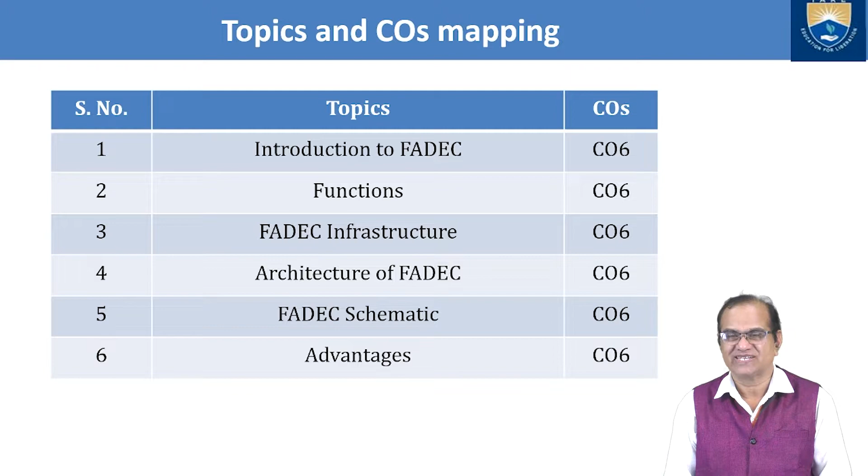FADEC basically uses a lot of sensors, and these sensors feed the computer, and this computer further gives signals to the actuators, and these actuators work. It is an automated system. Nowadays most aircraft have FADEC, and even automatic driverless cars are using the FADEC system nowadays. So I will go with the introduction first. Introduction to FADEC.

Full authority digital engine control, FADEC, means just that: there is no direct pilot control over the engine or manual control mode. So if you are using FADEC, the pilot does not have any control over the engine. The engine will be fully operational and do all the functions without any intervention of manual control. If the FADEC fails, the engine also fails. So that is a very big drawback.

However, system redundancy makes it much less likely for a FADEC system to fail than a traditional magneto system. The FADEC is made in such a way that there is little chance of it failing, and it is much superior to the traditional magneto system we used before FADEC was developed. In fact, a double magneto failure is statistically more likely than a FADEC failure. So even with a double magneto, the FADEC system is much better than the previously used magneto systems.

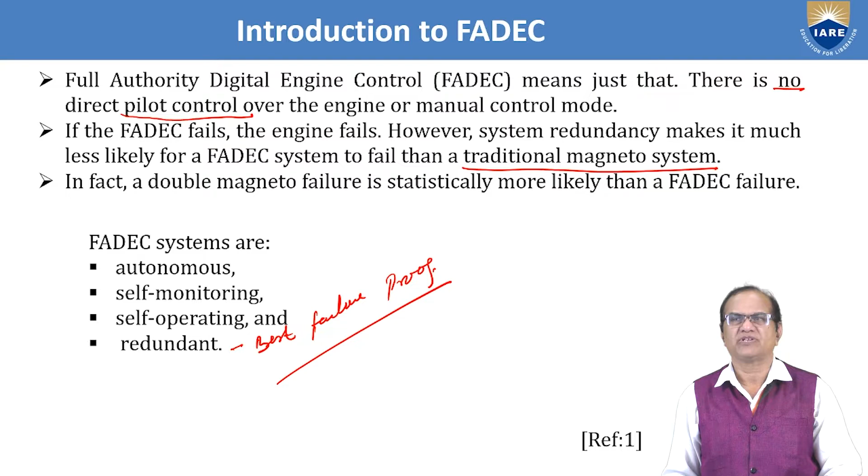This is also self-monitored and also self-operating, and then redundant. It is failure proof. Almost it is the best failure proof. That is the redundant. That is why the FADEC is used nowadays in most of the aircraft. Okay, I have shown here the functions of the FADEC. So here we can divide into 3 groups.

FADEC will control the engine, that is called the engine control. FADEC will also be useful for the airframe communication. Okay, it will also do the engine health monitoring. So this has got 3 functions. One is the engine control, second one is airframe communication, third one is the engine health. So this is the first one, this is the second one, and here is the third one. So these three functions it is performing.

So if we talk about the engine control, the engine control is done by acquiring sensor data. Then it processes the control laws and then command actuation. So in the atmosphere and other places, sensors are fixed. These sensors will pick up the data and they will give to the computer. In the computer, data will be processed as per the control laws. These laws will be applicable and this will give command to the actuators. And this actuator will function and your quantity of fuel will be less or more as per this data.

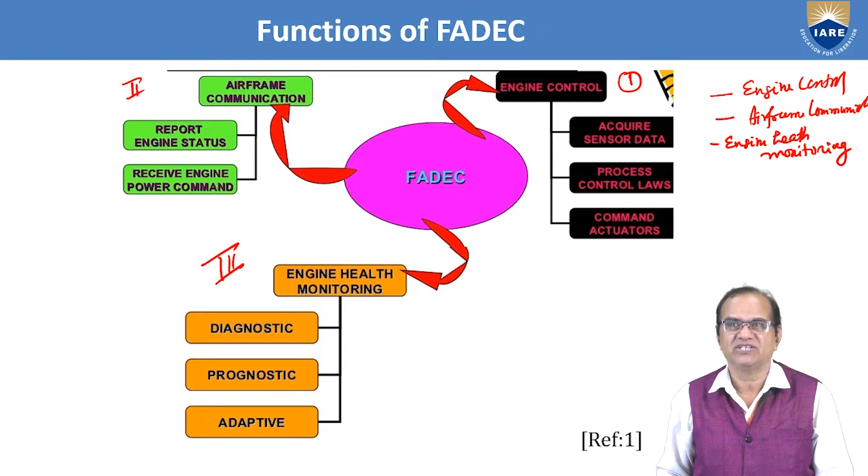So what are the features of this FADEC? The control and monitoring of engine operation. So it is the main function of this thing, control and monitoring of the engine operation, dual channel and the redundancy. For everything you have the double system. So the redundancy of the aircraft and engines is very highly increased.

Engine life monitoring. This will also monitor the engine life. It is also measuring the wear and tear of the gas turbines, compressors and all the equipment associated with the engine. Record of engine performance parameters: this is also recording engine performance. At every flight it is recorded in the recorder. Automated troubleshooting. If any fault is going to happen or has already happened, the problem is automatically solved by another standby system.

Memory read or recall of engine data. It is also memory read, the full record of the engine, all performance, all parameters, all different types of activities are recorded for the engine data. Control of common engine problems. Those problems which are very frequently coming are also solved by the help of FADEC. Display of warning. These warnings will be displayed in the cockpit for the pilot. So the pilot can also know that there is going to be some problem or some problems have already happened.

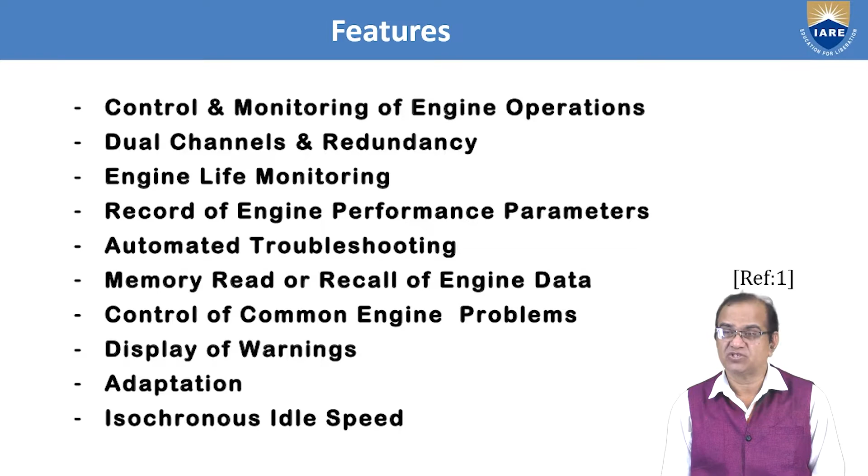Next, it is adapting as per the situation. It also gives isochronous idle speed. So it will also help for this purpose. If you talk about the FADEC infrastructure, different types of infrastructure are needed for different aircraft. So this infrastructure is divided into a number of parts. Here, the first part I am going to discuss is the control operation in a gas turbine engine. In a gas turbine engine, how the control is operated.

So you can see here that this is the combustion chamber, I am writing CC, and here is the propeller, it is rotating, and from here you will get how much thrust is produced.

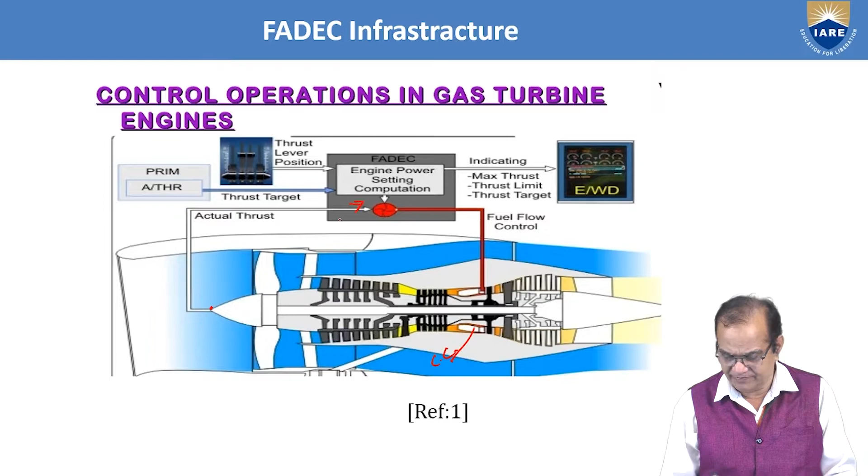So this thrust input is coming here, and the temperature fuel flow is going from here. Here we have the engine power setting computation. It is a FADEC here. So it is computing how much power is required. Here we have primary A and thrust target, and here thrust lever position.

So as per this actual thrust, how much it is coming, it will sense here, and then it will target thrust here, and accordingly this thrust lever will be operated for the system. If you see here, you will get the indication in the cockpit. You will get maximum thrust, you will get the thrust limit and the thrust target. All will be visible in this screen,

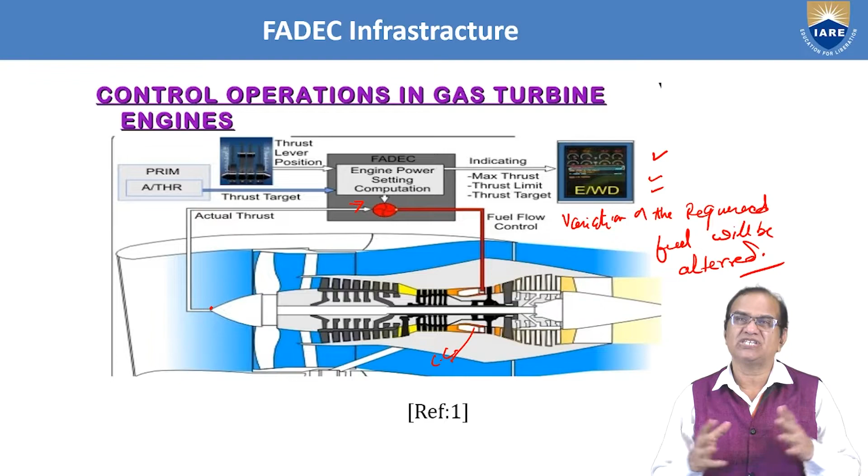and accordingly the variation of the required fuel will be altered. Okay, so that is the objective of such type of control operation in gas turbine. So here fuel quantity will vary, and accordingly the RPM and the thrust, all these things will vary, and this is done by the FADEC, and this is called the control operation in gas turbine engine.

So control in gas turbine engines: we can control the air, how much amount of air is required, that is the compressor entry. Next is the fuel control, main, afterburner and starting fuel system. How much fuel is required for different starting, that we can also control. Starting and ignition control, lubrication control, surge control through bleed valve. The surge of the engine is also a very dangerous activity, in which your compressor will start giving abnormal pressure, and also the flow will start in the reverse direction, and also thrust control can be achieved.

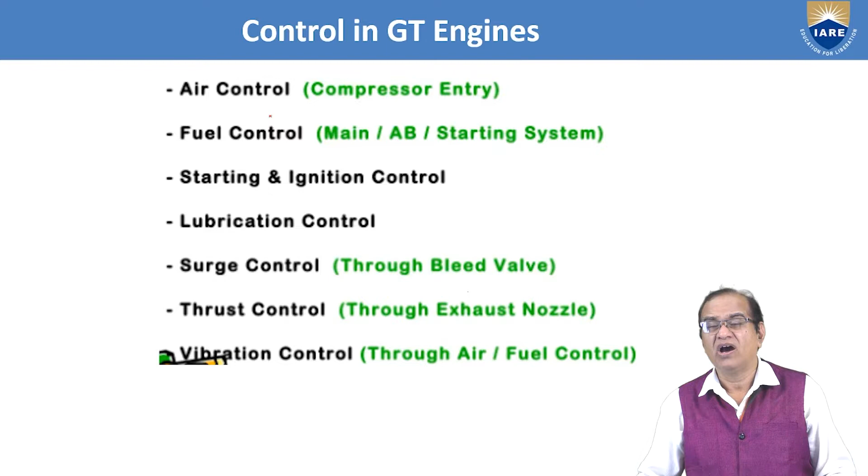The vibration of the engine also can be controlled and monitored through air and fuel control. So this vibration control is achieved by the inlet air and the fuel control. Thrust can be achieved by exhaust nozzle variation; the size, the area and other dimensions can be varied. Surge, through the bleed valve of the compressor, can be reduced. Lubrication control, starting, ignition control, fuel control and air control. These are the control functions of the FADEC. So this we have to keep in our mind.

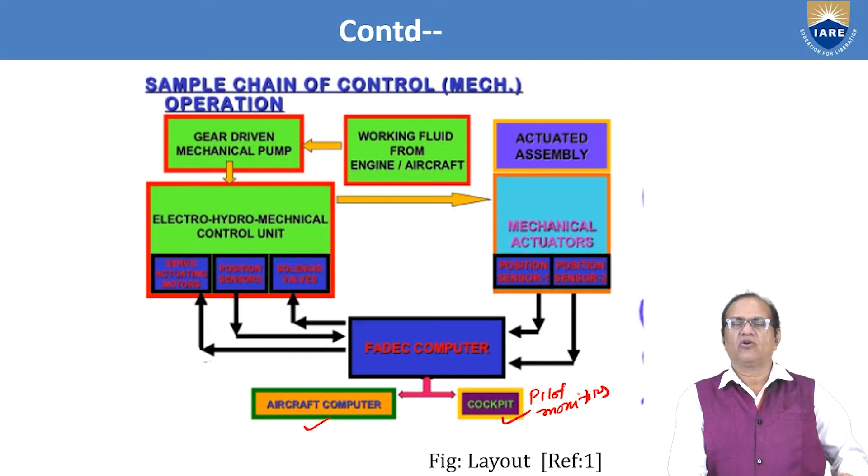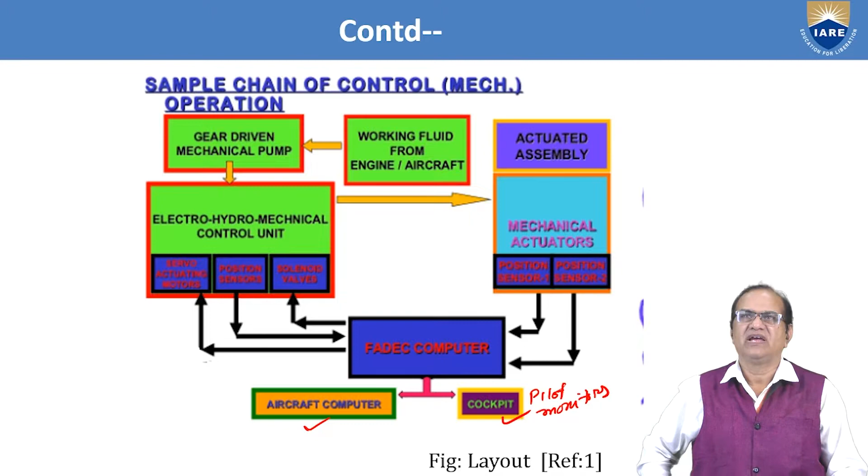Now electrical system. So here it is an electrical control system, and we can see that here we have the FADEC computer. From here you see the various inputs from the command to the engine, where it goes and comes. Here we have the various inputs from the aircraft, the pilot's throttle in the cockpit, the display panel in the cockpit. This is the cockpit zone.

Now from here we have the electro-hydraulic mechanical. It is the same type, but here we have double systems: signal coming and going, signal coming and going, and signal coming and going. In the previous one only one direction was there. These mechanical actuators are there, and from here this signal goes to this. Mechanical actuators will open or close as per the requirement, and here the green system shows

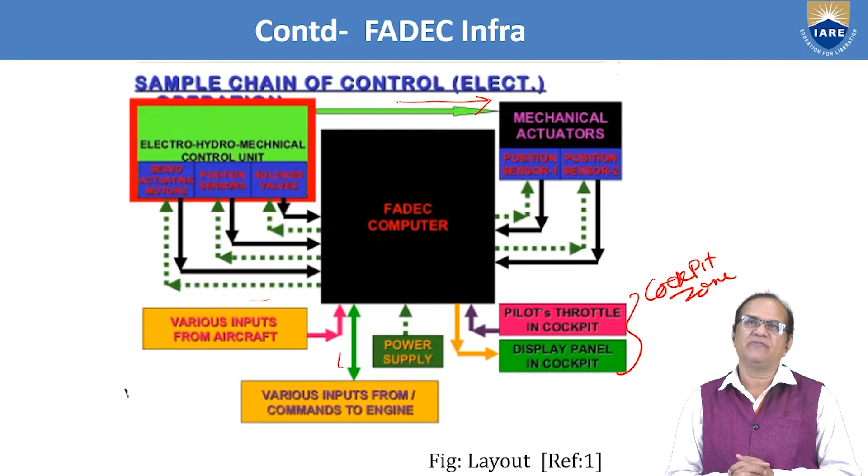your electrical. So this has got double redundancy compared to the mechanical one, because here if mechanical fails, electrical will take over and your system will work. So that is the advantage of these electrical FADEC systems. So now what are the hardwares required for the FADEC system, what is the software, and what are the other things required for the FADEC systems? We have to study and we have to understand.

So we need a dual power supply, meaning one is the primary, another is the standby or the secondary. FADEC computers with logic circuits, PCBs and programmable memories are required. A set of servo actuating motors, solenoid valves, position sensors for every system control unit, dual position sensors for actuators of every system. Here we should have the dual position sensors.

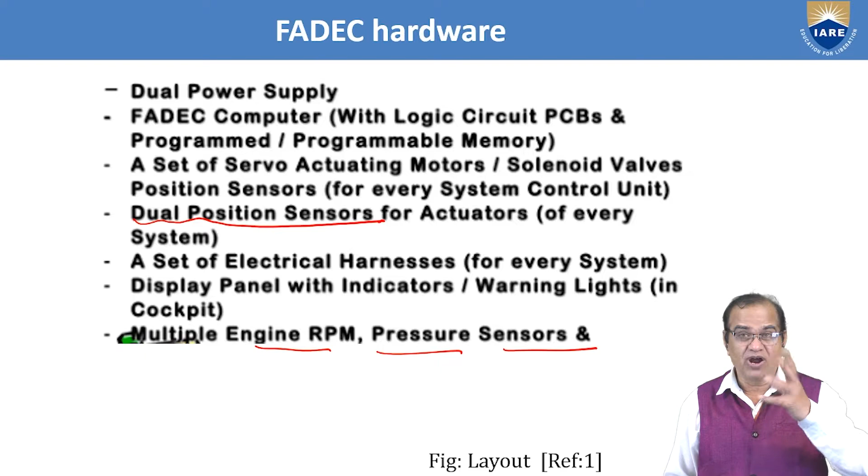A set of electrical harnesses for every system, display panel with indicators, warning lights in cockpit, multiple engine RPM, pressure, and these are the sensors to be used. So these are the items required for the FADEC hardware. So if you want to make the FADEC, these equipments are needed, and they are the hardware. Now I will talk about the FADEC software.

In this we have EPR, engine pressure ratio schedule, for thrust over the entire range of engine operation without FADEC computer failure. Next we have N schedule for thrust as per pilot's throttle, engine operation in case of limited FADEC computer functionality. So the EPR schedule gives thrust over the entire range of engine operation without FADEC computer failure. So in that, EPR schedule is required.

Then we need N schedule for thrust as per the pilot's throttle, engine operation in case of limited FADEC computer functionality. Here we should note that in case of a certain degree of FADEC failure, there is an automatic mode switch over from EPR to N rating. However, if the failure disappears, the pilot can reset the system. So the pilot can change from EPR to N, and this can happen in partial, certain degree of FADEC failure.

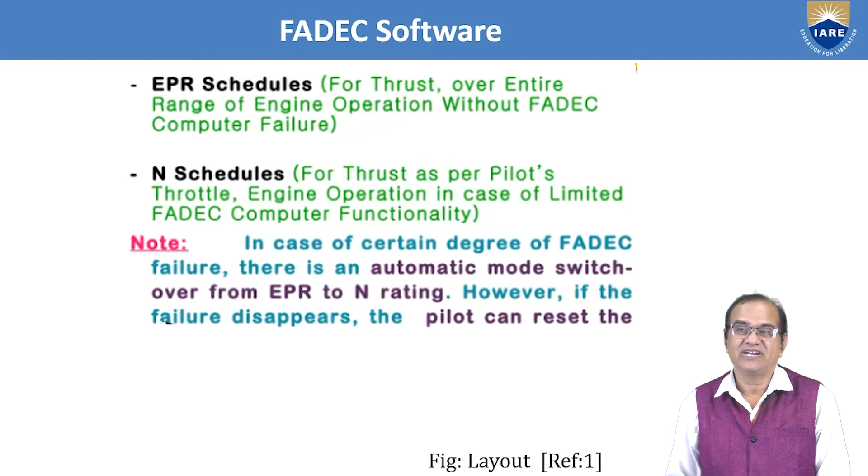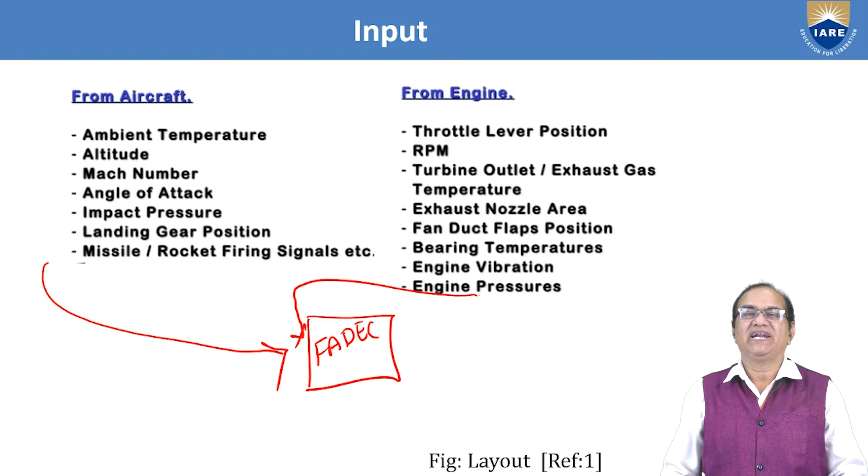So what input and what output do we need from the different zones for the FADEC? For aircraft, what inputs does the FADEC need? So if this is the FADEC, these inputs are from the aircraft and these inputs are from the engine. So what are these? Ambient temperature, the temperature of the surroundings. At what altitude your aircraft is flying? What Mach number your aircraft is flying? Angle of attack, impact pressure, landing gear position, missile rocket firing signals, etc. It needs these from the airframe.

From the engine we need throttle lever position, RPM of the engine, turbine outlet exhaust gas temperature, exhaust nozzle area, fan duct flaps position, bearing temperatures, engine vibrations, engine pressures. So these are the parameters we need from the engine, and they are extracted by the sensors, and these sensors give signals to the FADEC. The FADEC, a computer operated system, will take the decision, calculate, and accordingly send the signal to the operating actuator.

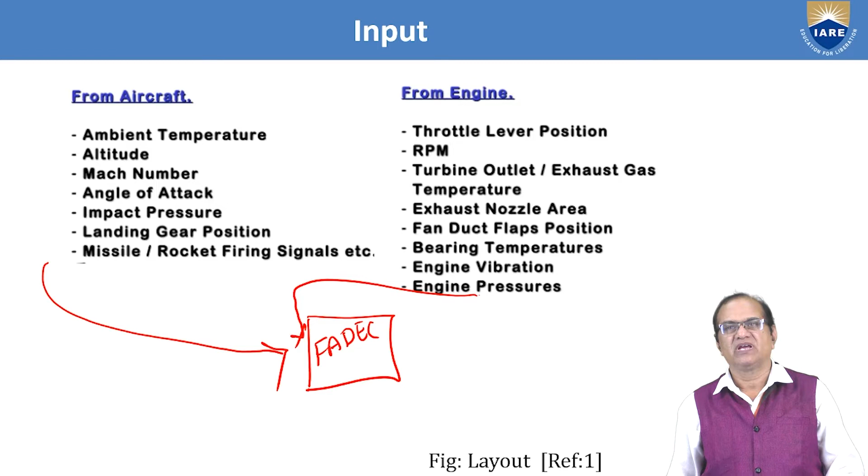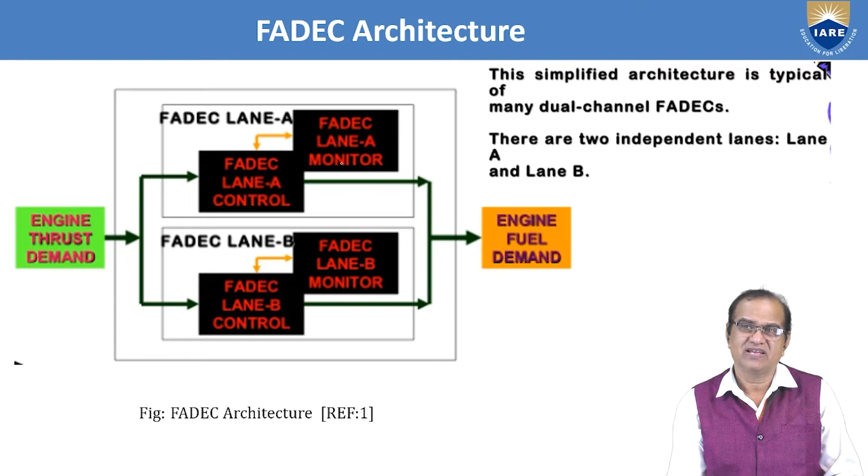From here it goes to FADEC lane A, and the other is FADEC lane B, this below one, with the FADEC lane B monitor. Here is the FADEC lane A control and FADEC lane A monitor. So control and monitor are part of the FADEC, and here we have the double system. Dual redundancy is obtained: if one system fails, the other will start operating.

So each lane comprises a command and monitor portion which are interconnected for cross monitoring purposes and undertake the task of metering the fuel flow to the engine in accordance with the necessary control laws to satisfy the flight crew thrust command. The analysis required to decide upon the impact of certain failures in conjunction with others requires a Markov model in order to understand the dependencies.

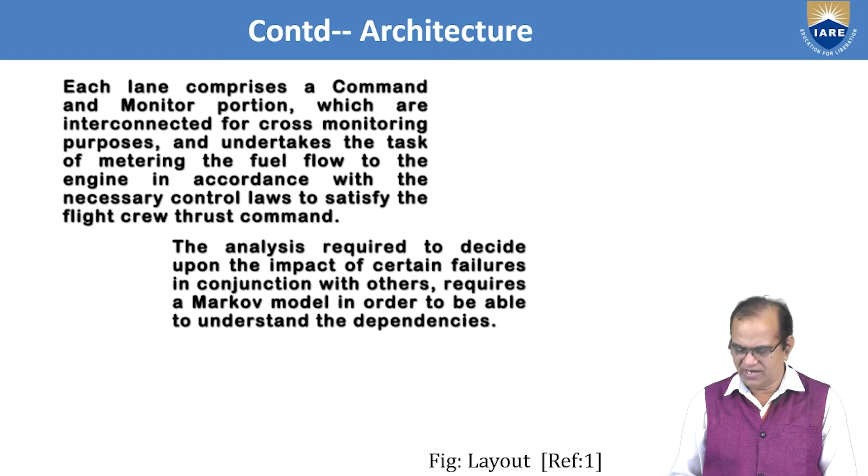Now, what are the features for military and transport aircraft, especially in relation to the FADEC system?

So here we need the feature, the compressor entry guide vane control for LP compressor and HP compressor. So compressor entry guide vanes are required. Main fuel control, AB fuel control for core and for fan AB. Starting fuel control and the ignition control is required. Bleed valve control and the fan duct flap control is also required. Exhaust nozzle control. So these are the requirements or features of the military and the transport aircraft.

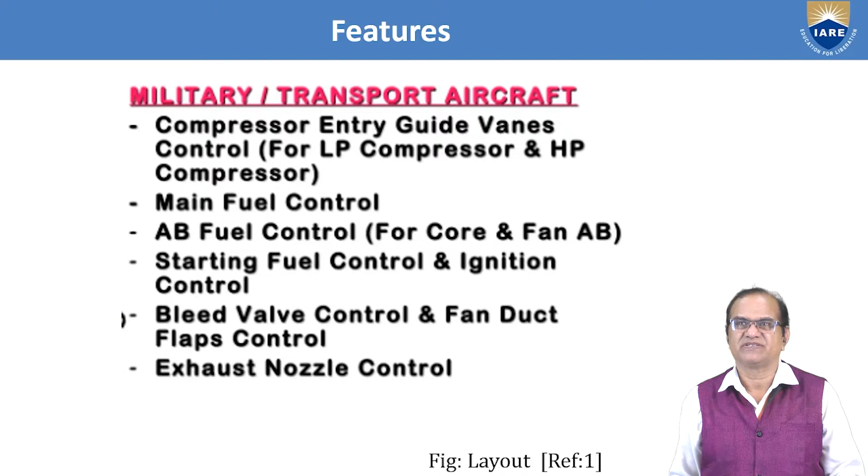FADEC features. Here I am showing the schematic diagram of FADEC, a typical schematic diagram. I can see here the pilot in cockpit. This part is pilot in cockpit, sitting here. Then here we have the aircraft computer, then the power supply. This goes to the FADEC. Pilot can directly operate the EECU, electronic engine control unit. Here is the FADEC. Power supply, one goes to the FADEC and another goes to the EECU. Starting and monitoring, the control is performed, and all this input goes to the EECU. It is a major component which is monitoring and controlling all the engine parameters.

So this will go to the low pressure compressor air inlet guide vane control, high pressure compressor air inlet guide vane control, main fuel control, core AB fuel control, fan AB fuel control, exhaust nozzle control, fan duct flap control, bleed valve control. So if you see here, all these controls explained in this schematic diagram are done with the help of sensors. And the FADEC is a computerized component, very small but very powerful, able to perform all the types of tasks which the aircraft is supposed to perform.

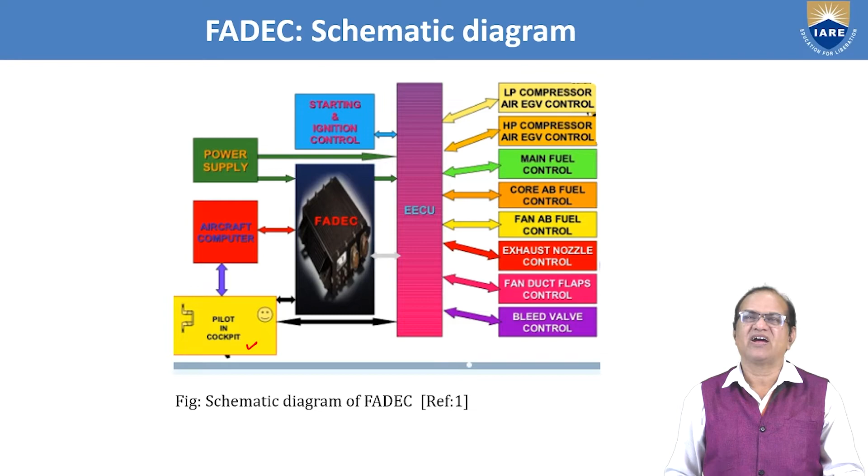Further, we can divide the control architecture into different methods: centralized method and distributed method. I'm going to discuss centralized control architecture. In this, a centralized system works to make sure the systems are working properly. So here we have sensor 1, sensor 2, sensor J, sensor N, actuator 1, actuator 2. These are the actuators. This sensor gives to the sensor electronics, this also gives to the sensor electronics, and this sensor also gives to the sensor electronics. From here the signal will go to the bus bar. From this bus bar, the sensors will communicate, and all communication comes here to the central processing unit or memory. It is of the computer.

It will go to the computer, and from here to the FADEC, and this power will be supplied. This will go to the actuation electronics, and to the actuator, and this actuator will operate the engine control or flight control as per the requirement. So actuation electronics, different actuation 1, 2 and N. There may be so many actuators, and also 1, 2 and J sensors - so many sensors. As per that, it is called the centralized control architecture, so everything is controlled by one CPU memory system.

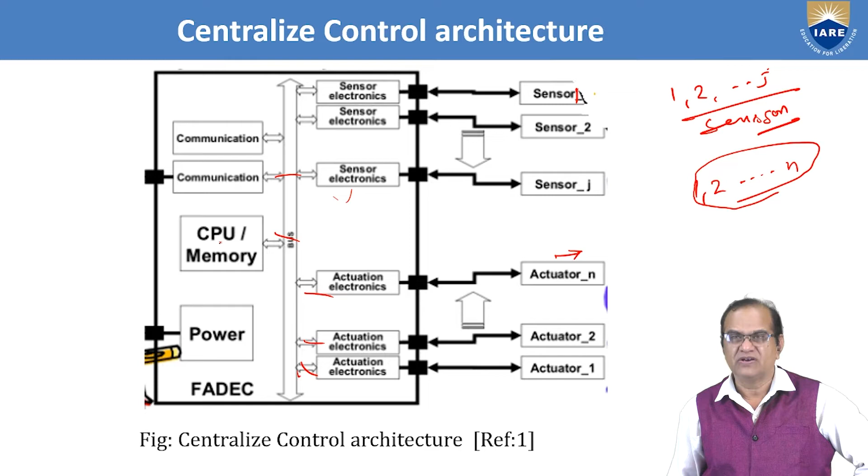Now I will discuss the advantages of the FADEC system, why we use it and why we should not. First and foremost, it reduces air crew workload. This is very much essential, because if the pilot is fully concentrating on flying the aircraft, the pilot cannot see the safety aspect, cannot see what is happening surrounding. So the pilot in this type of aircraft where FADEC is fitted is mostly concentrating on safety aspects of the operation, especially for fighter aircraft. They have to monitor so many aircrafts, missiles, rockets, and so many things, so the pilot can concentrate on other issues, not only flying the aircraft.

Improved fuel efficiency by using the FADEC. It is 100% sensing all the parameters and it will fly as per the economical zone. 15% of the fuel can be saved - it is a huge amount. Due to faster, accurate engine control, no trimming is required.

Reduced aircraft weight. By using this FADEC, the weight of the aircraft has been reduced. The size of the engine is reduced due to absence of heavy mechanical assemblies, no scattering of the pipelines and the electrical wiring. Everything is by the very accurate system. Wires and pipelines are much reduced and the weight of the aircraft is reduced tremendously.

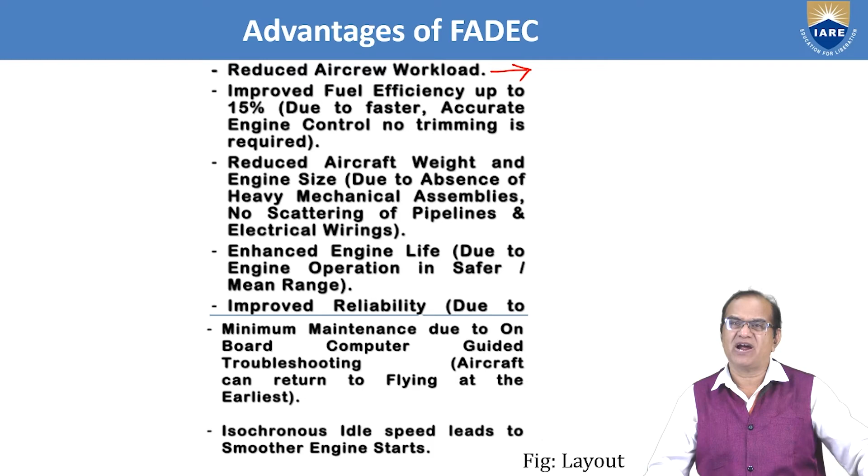Minimum maintenance due to on-board computer guided troubleshooting. Aircraft can return to flying at the earliest. So in this, the maintenance also depends upon the computer which is fitted on the aircraft. The computer will say what to do, what not to do. Previously we used to do it with the help of aircraft manuals, but now it's not like that. Your FADEC system will say what component you have to do maintenance on, what component you have to replace, what component you have to do some servicing on. All these parameters are guided by the troubleshooting by the computer, and the servicing time is tremendously reduced. The spare parts which we normally didn't require but used to replace, that is not done if the FADEC is there.

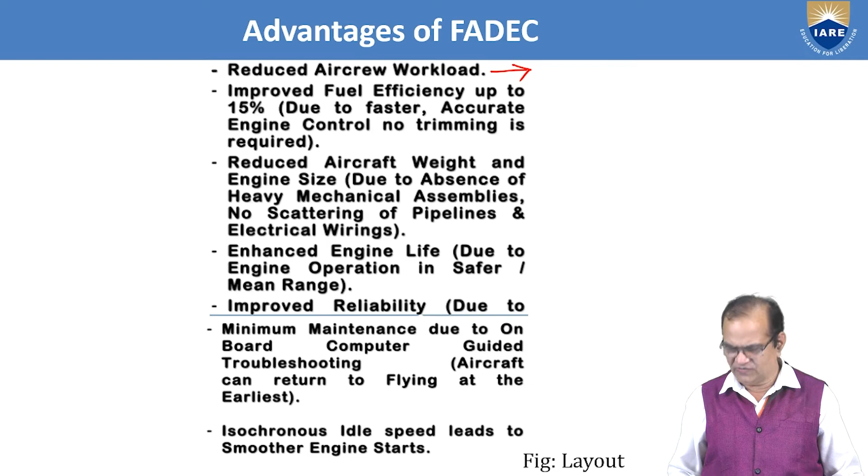Isochronous idle speed leads to smoother engine starts. So during starting also a very isochronous speed is achieved and the engine starting is very smooth and very reliable. So maximum performance in a combat aircraft, or optimum fuel economy in a transport aircraft, are possible after necessary adaptation programming of the FADEC computer.

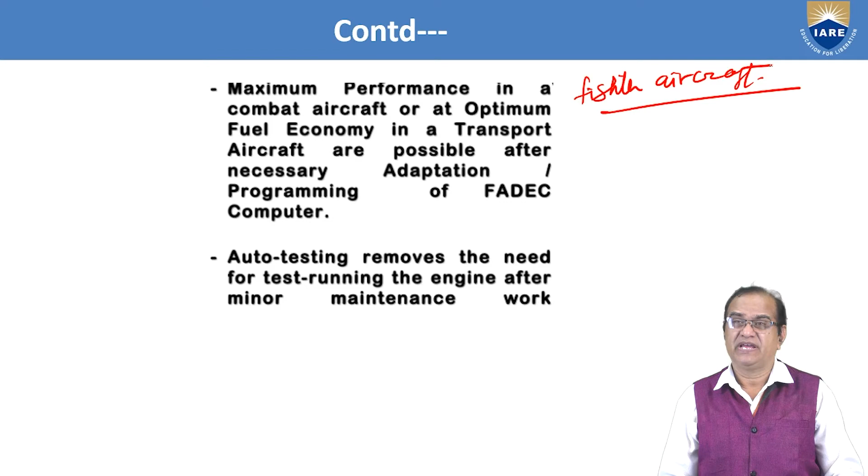If you use the FADEC, maximum performance is achieved, especially for the fighter or combat aircraft. A huge amount of performance is needed. The aircraft has to maneuver, it has to take off all of a sudden.

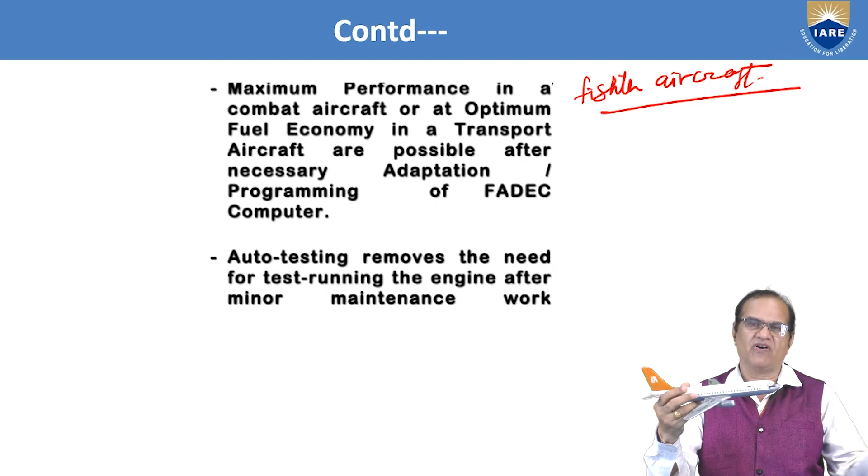If you see here, this is the aircraft, it is flying like this. All of a sudden, the pilot feels that there is a missile coming, and the pilot gets this on the monitor, on the radar, and assesses the speed and the angle it is coming from. The pilot will start maneuvering the aircraft, it can go in a spiral, it can go like this, so that the missile coming from behind or forward, in any direction, will be confused. The missile will not be able to do such maneuvers as the fighter aircraft can do. So once the missile has crossed, coming back is a very difficult task, and the aircraft will immediately turn and run away from there.

So the aircraft performance in a combat aircraft, and optimum fuel economy also in the transport aircraft, are possible after necessary adaptation and programming of the FADEC computer. So if we program our computer in such a way that the fighter aircraft gets the best flying ability, the maneuvering capability, the combat capability, and the passenger or transport aircraft is able to fly to give the best economical flight where fuel consumption is tremendously reduced and the profit of the airline is increased without compromising the safety of the aircraft. That is the first and foremost requirement for any airline.

It also has auto testing, which removes the need for test running the engine after minor maintenance work. Previously, if some small problem was there in the engine, we used to run it on ground so many times.

So what happens, engine life will also reduce. So many wear and tear will be there. And fuel consumption, oil consumption will also increase.

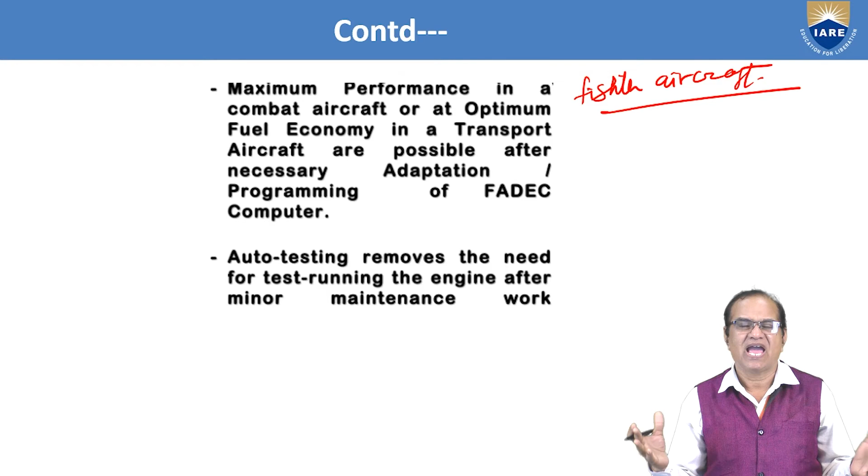So nowadays the FADEC has made the auto testing system, and that system is so robust that it removes the need of running the aircraft on the ground without any fuel consumption or without any power use, and it is very reliable. Auto testing system is available on the FADEC system.

So very useful as of now for the aircraft operation. But we have certain limitations of this FADEC, so that also we have to take care of before we go for any final conclusion. Pilot cannot override the FADEC control. If it is a fully automated control system, FADEC, pilot will not be able to override. Whatever is given the feed, this will follow the same feed without any intervention of the pilot. If pilot wants also to do something, pilot will not be able to do anything.

In the event of complete FADEC failure, pilot is left with no other option than having to fly with least performance, just sufficient to land safely.

This limitation has been removed in modern transport aircraft by having 2 FADEC computers. Previously there used to be only one FADEC computer. In the event the FADEC has failed, pilot does not have any choice, but it has got only the minimum performance. It has to go and land only in the nearest available place. That was the scenario - it cannot go and fly just sufficient to land safely.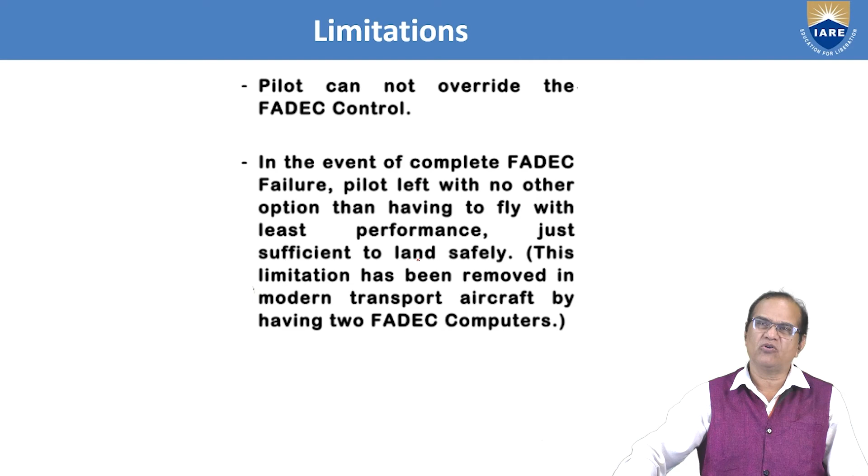This limitation has been removed nowadays by introducing one more FADEC computer for this system.

So here is my message: safe takeoff and safe landing, always. Do not take chance. Aircraft is a very lovely flying machine, also very safe, but we all have to take necessary precautions for flying the aircraft - not only the pilot, not only the engineers, everyone. The flight safety is for everyone. Always, your passenger or you are the technician or you are any person on the dispersal or the aerodrome or airport, everyone has to take necessary precautions for safe landing, safe takeoff, and safe flying.

So the FADEC is one of the equipment which gives a better flying capability, which gives a better controlling ability, gives a better flight, and saves a lot of fuel. So it is very environmental friendly. It increases the life of the engine and what not. All the benefits you are getting by using the FADEC system.

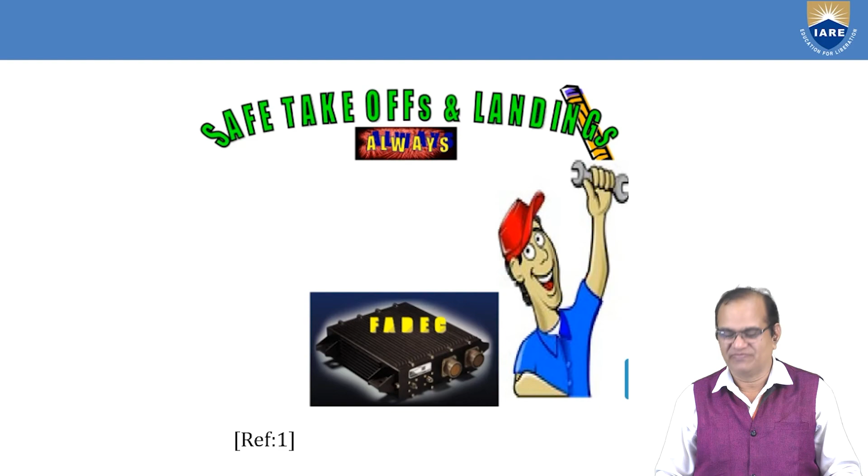As of now, I have completed my 56 lectures, and in these 56 lectures, I have completed all type of aircraft systems related topics.